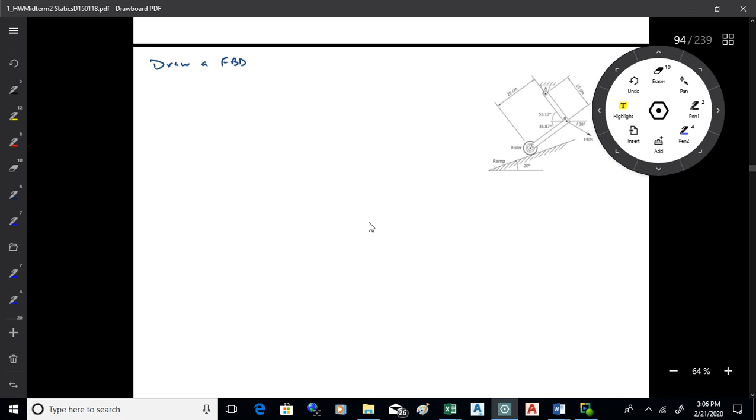One thing I noticed, I graded a lot on process on this one. A couple of things: one is I'm asking you for the answers on the bottom usually, and then I'd like arrows showing the direction the forces act. Remember to do that. There were people who weren't doing that.

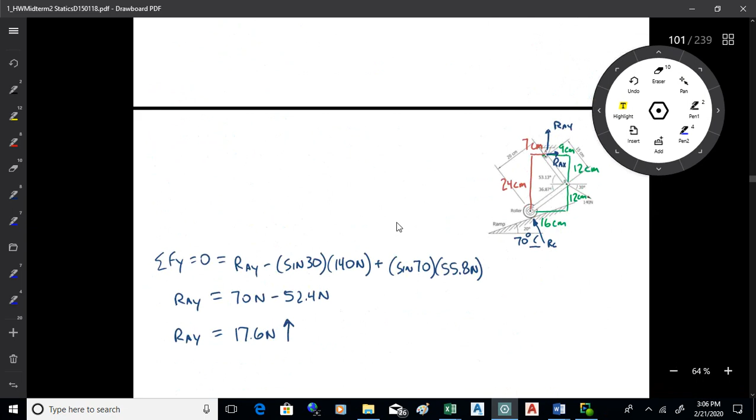Another thing too, I was catching some errors in the setups as best I could. I do get the impression that there are some folks who are setting stuff up incorrectly and then somehow getting the right answers, which might be due to the fact I give you the answers. I'm not sure, but I would advise against that.

If you're setting something up and something's not right, and if you can't figure it out, just put a note in there, say I don't understand what's going on, and I'll answer it. When you get the right answers from a wrong setup, I don't notice that, and then you might be learning something incorrectly if you're doing that.

So I would encourage you to not focus so much on the points you get out of the homework as much as learning from it. If there's something on there you don't understand and you can't figure it out, put a note on there, and when I grade it, I'll answer it, okay?

I would not suggest setting it up incorrectly then putting the proper answers down in the answer blanks. I don't think that's a good way to learn the material. I just mentioned that because I was noticing it a few times, and when I see the right answers there, sometimes I'll miss the errors in the setup because it's a lot of detail to scan through with all the signs and things. So be aware of that.

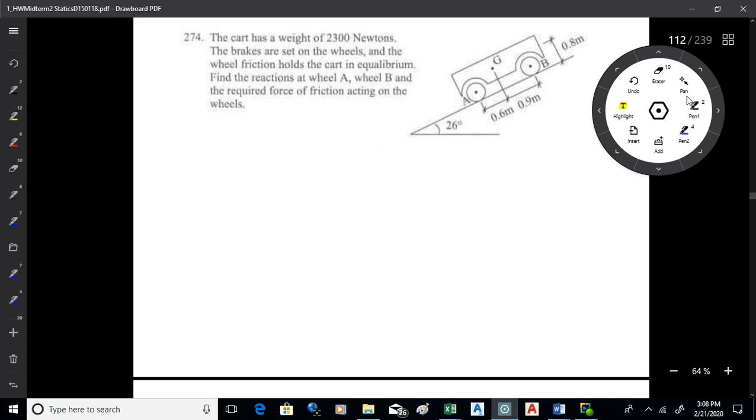Yeah, of course, first thing you do is you draw a free body diagram. We're going to have the weight here, right? You are given the weight, so you can put that on there, 2,300 newtons. You do have reactions, those are rollers basically, is what they are, that's what wheels are. So we've got RA, RB. We do have a frictional force that's keeping this thing from rolling.

So a moment where 2 of those forces intersect, I think that might be a good spot. What's the other little bit on this one? What might be the way to approach that? Any little extra thing we might want to do?

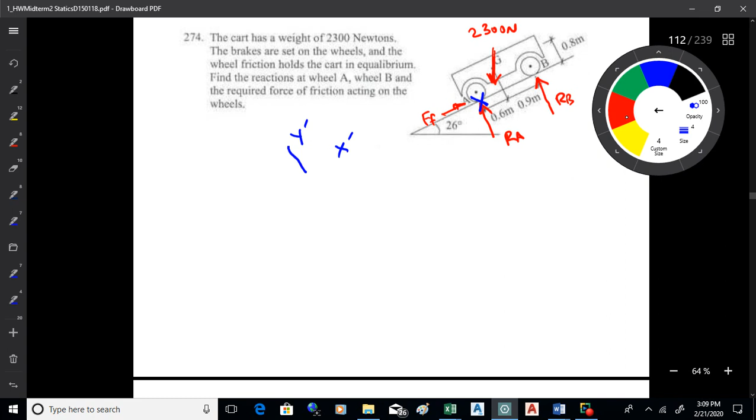It'll be a simpler problem if you do. And then the one angle you need now is this one here. Now that's going to be the same as the ramp angle, that's going to be 26 degrees. Because what's going on there is we've got a 26-degree ramp, and then we're kind of using an axis normal to that, and then we have a vertical force like so.

So it's a little bit of a geometry problem there. I guess if we went like this and extended that down, this would be 90 minus 26, wouldn't it? Otherwise known as 64, so that's 64. And then if I extend this down to the right angle there, I'll take 90 minus 64 and get back to the 26. Okay, so that's how you could figure out that angle.

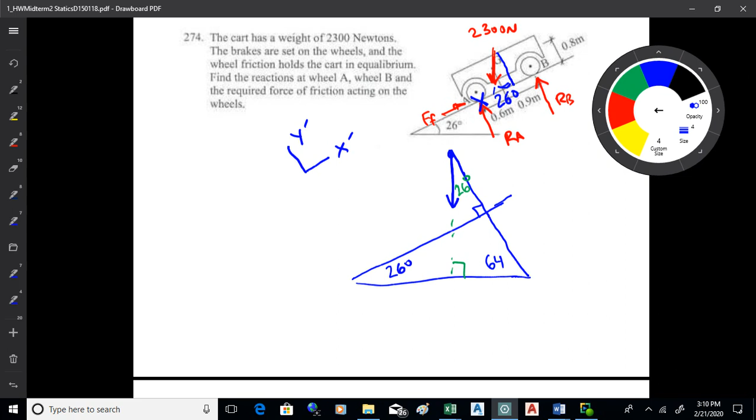So by putting that angle up there, and using an inclined axis system, that becomes a much more straightforward problem, I think. So I would definitely approach it that way. Now when we do that, we want to start with a moment about the point where 2 unknowns intersect. So I think A is a very good point. Now it's not the central axis of A, it's the base of the wheel, because the friction acts there too.

And set that equal to 0. And then when you do that, I think what's going to happen next is you're going to have this force at the center of gravity.

So you want the adjacent component, that'll be cosine 26 times the 2300 newtons. And then the moment arm on that will be the 0.6 meters. And that will come around clockwise, I think, so we want a negative sign on that.

Now, there's another component that involves the 2300, and this is one that people, from my experience, are apt to forget. So put another component there. You're going to have a component parallel to the ramp, and sometimes people forget that. So remember to include that, okay?

Up there in the moment equation, you'll have an additional term with RB. And of course, you want a moment arm on that. So something like that would be the way to go.

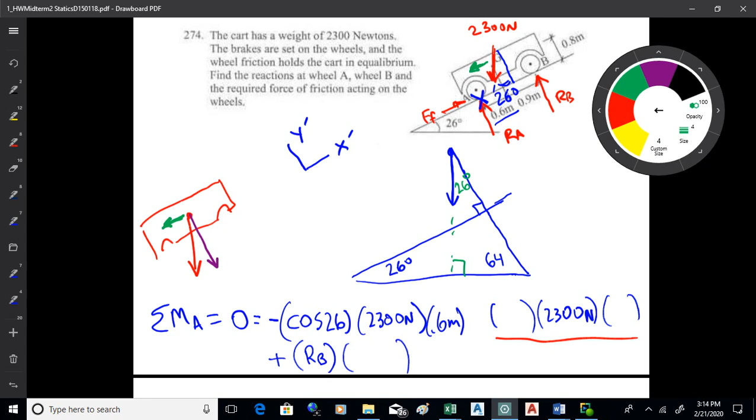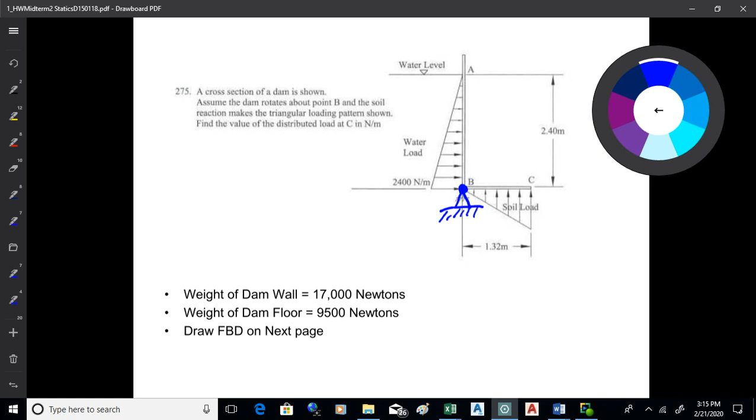All right. So what you're going to end up with then is these distributed loads, and what we want to figure out is what's going on with this soil load here. What's the force per unit length along at the end of that is kind of what I'm looking at. Now this is going to involve getting the resultant forces from these distributed loads.

So your soil force will be like that, and that will act through the centroid. Now you don't know what the magnitude is of it yet. You'll be able to find that, but you do want to lock in its location. And I believe that's 0.88 meters, if memory serves, which is two-thirds of 1.32.

Now what's going on here is when I look at that, I know that I always start with a free body diagram. It's just kind of very ingrained, like a lot of engineers start their morning by drawing a free body diagram of their day or something.

I had a friend in college who constructed a Venn diagram to prove that his girlfriend couldn't see someone else and him at the same time. I came into the living room and he was crunched over in a little rocking chair trying to prove this to himself, having all these problems. He obviously needed some assistance, so I tried to help him work through it. He was seeing someone else at the time too, so I chose not to point that out to him. It was very complicated, he was lost in the details. We got through it somehow.

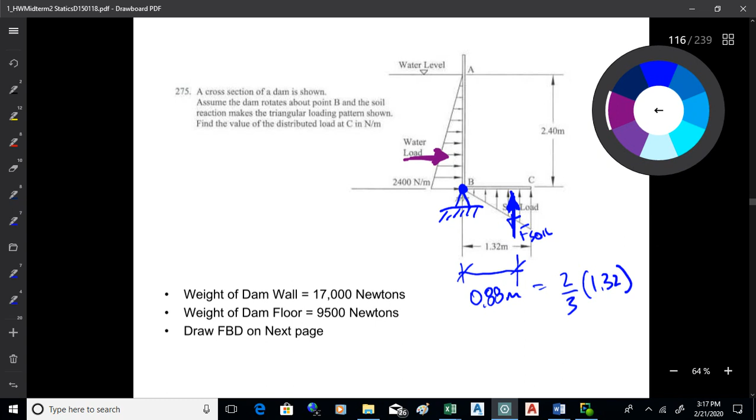Okay, so what we do next is I'm looking at that, and I'm going to sum moments about B. I know I'm going to do that because I've got a pin joint, and the last unknown, since all I can do with statics, is F soil. So I know I'm going to take a moment about B to get that done.

Now, if I'm going to do that, then what I want to do is dimension everything from the pin joint. So we're solving the problem, but I'm also trying to talk a little bit about the process. This is the thinking that goes into solving the problem.

Moment about B, so I want to dimension from B, so I'm going to want this dimension here. Now notice, why was that 2/3 on that dimension? Why not 1/3? I'm coming from the vertex, not from the right angle, but from the acute angle. The centroid of a triangle is right there - it's base over 3 from the right angle, which leaves 2/3 of the base from the acute vertex. That's why I'm using 2/3.

And then I've got the distance up from the right angle, so this will be 1/3, won't it? So that'll be 0.8 meters, because I'm doing 2.4 over 3. I think you should be able to come up with that load there. The load will be on account of that force of the water, basically. So that's 2.4 meters over 3, that's the 0.8. So what I'm going to end up with then is a force right here - that's F water.

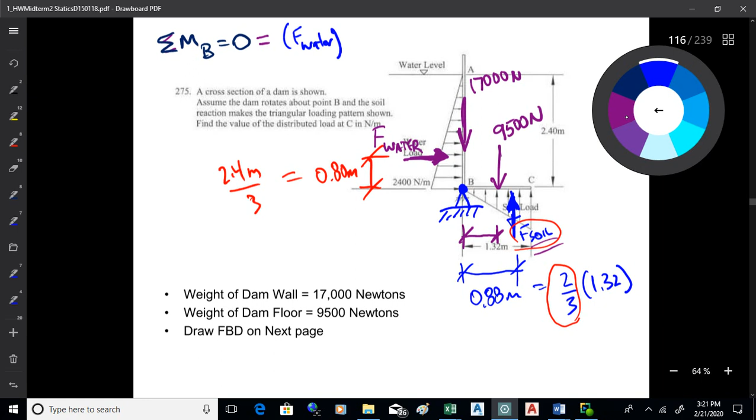So now I just plug it into the equation. You're going to find the force of the water - that's just the area of that triangle, and you're going to multiply that by 0.8 meters. And then you're going to look at it and go, well, if that force of the water is coming around like that, that's clockwise, and that means that's negative. That's how I approach that.

I'm not going to worry about that 17,000 because it pushes right down at B. I'm going to have minus 9,500 newtons times that moment arm. And then I'm going to have the force of the soil up, and that's my unknown. That'll be times 0.88 meters, like so. Did I get everything that I need? I think I did. All right, and then I'm going to find the force of the soil.

All right, and I believe that's 9743, if I'm not mistaken.

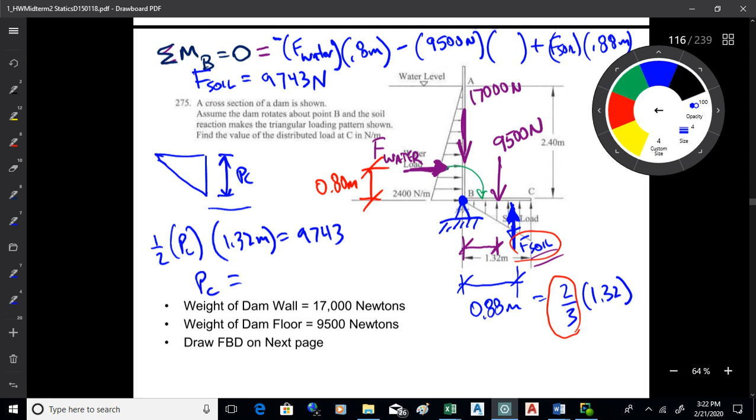The force of the soil is the area of that triangular diagram. What I really want out of this problem is this value right there, and that's going to be 1/2 times whatever that value is—I called it PC, I don't know why, but I did—times the base, and the base is 1.32 meters, and that equals 9743. That gets me the soil load per unit length, and that's 14,762 newtons per meter. So that's the value at C in newtons per meter.

Now, if you're doing this as a project, you're going to get that into a pressure. You'll look at the width of the dam and divide that out to get a pressure. Then you're going to check your soil and see if it can handle that much force, that pressure pushing down on it without essentially collapsing and caving in. Then you'll look at that number to make sure the soil can handle it.

And then to finish this thing, so we good with that? Any questions on this? What's going on here—the moment about B?

Especially in a problem like this, I'm not going to just try and do all the area calculations for the forces and the centroid calculations all at once and throw it into one big equation. That isn't how I would approach it.

I want a cleaner diagram first. So we good?

Okay, sum of Fx equals 0. To finish this thing up, you'll get RBX from that, and that is 2880.

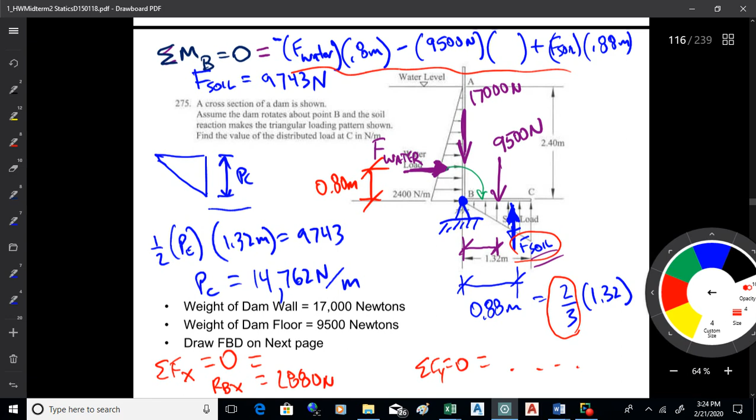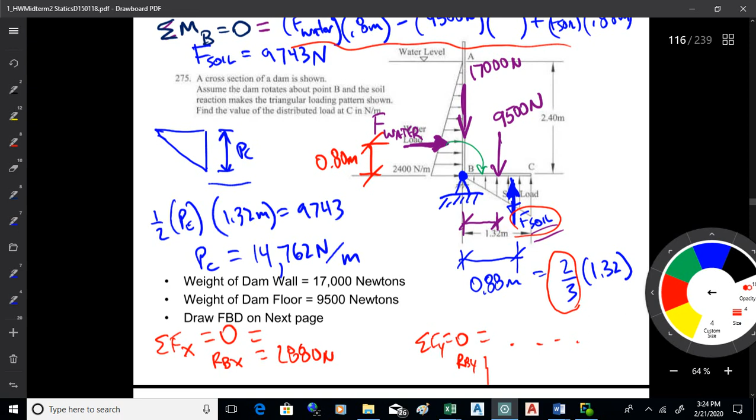And then sum of Fy equals 0, and you'll do that, and that will get you RBY. RBY is 16,757 newtons. So we good on that one?

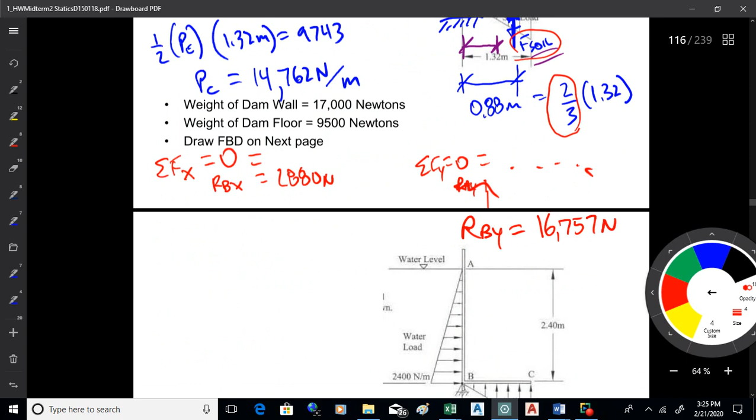Okay. Last one is this.

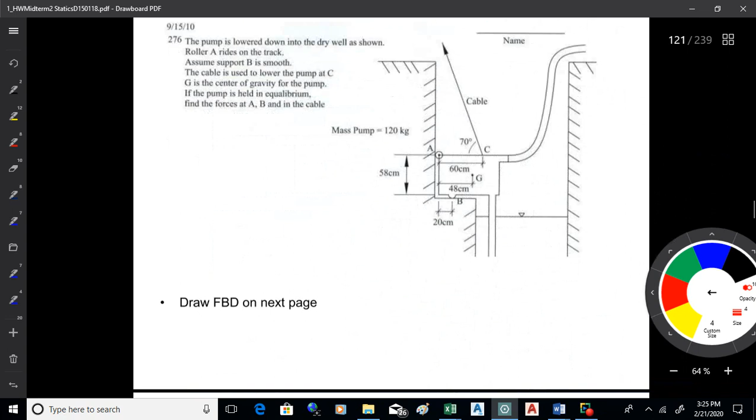All right, this is a pump in a wet well. Wet wells are kind of unpleasant places to work in, so they often put a little rail down the edge of the wet well. You put a chain on the pump and you can just pull it right out. It levers into a flange fitting with the pipe on the wall. That's usually how that works.

So we're going to pull this thing up and out. We've got roller A riding on the track, and the track runs on that vertical wall. Assume B is smooth. The cable is used to lower the pump. We want to find the force in the cable and the reactions at A and at B.

Now we've got to get a free body diagram. We've got smooth connections and a roller at A and a kind of half-circle thing there at B. So how are those reactions going to look at A? In what direction will the reaction at A go? We've got a vertical wall, a smooth connection, and a roller—which way is it going to go? Yeah, something like that. You good with that?

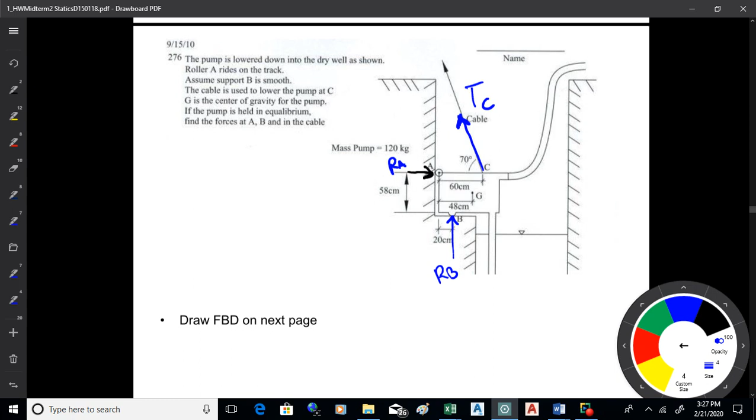Now, I've given you an awful lot of problems with pin joints, but you notice this one doesn't have a pin joint, does it? Darn it. So we've got to solve for one unknown. We've got 3 unknowns, we've got to solve for 1. So what is the strategy to do that, do you suppose?

If I want to come up with one equation and solve for one of those unknowns—yeah, I think C would work. There's a couple points you could take moments about that would work. Now why will that work? Why is that a good idea? Because I've got that force in tension, and if I just project A out, that goes right through that point, doesn't it? So by taking a moment about C, you eliminate A and C from the equation, and you can solve for RB. Is that good? So sometimes you have to think a little bit and project forces to find intersections.

You could also, if you wanted to, figure out where that point is, take a moment about that, and you could solve for the tension in C also. Either way, okay?

So sum of MC, that will get you RB—353 for that, I think. And then sum of Fx and sum of Fy should finish it up. Let's see, you probably want to do a sum of Fy first, though, I think. Like that, okay?

So we got any questions on that? Doing all right? Okay.